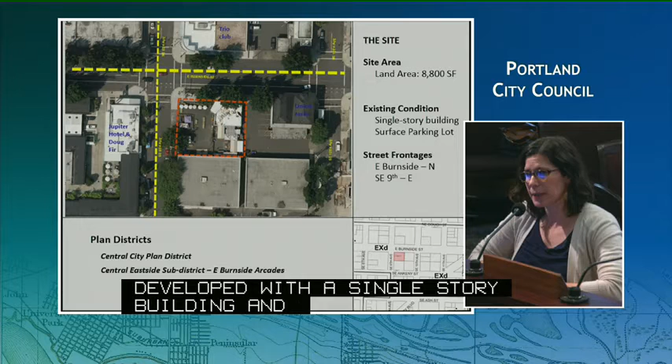Hello, good afternoon. I am Stacy Monroe, representing the Design and Historic Review Team with Land Use Services of BDS, and I'll be doing a brief presentation for the appeal of the Design Commission decision of approval for the Jupiter Hotel expansion. So just to get you acquainted with the site and the project, the site is located on the screen with the red outline. It's at the southwest corner of the intersection of Southeast 9th and East Burnside. It's a little under a quarter block sized lot, currently developed with a single-story building and a surface parking lot. It resides within the Central City Plan District, and more specifically, the Central East Side Subdistrict, where East Burnside has the arcaded condition.

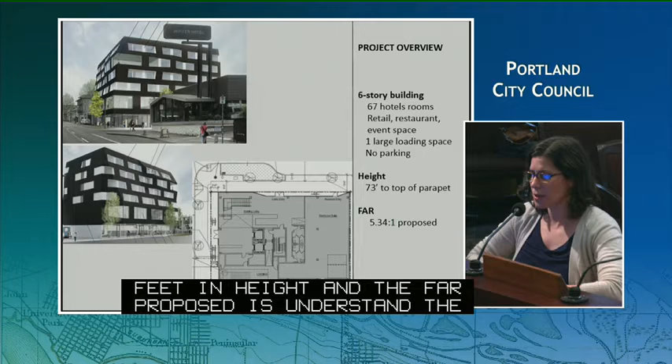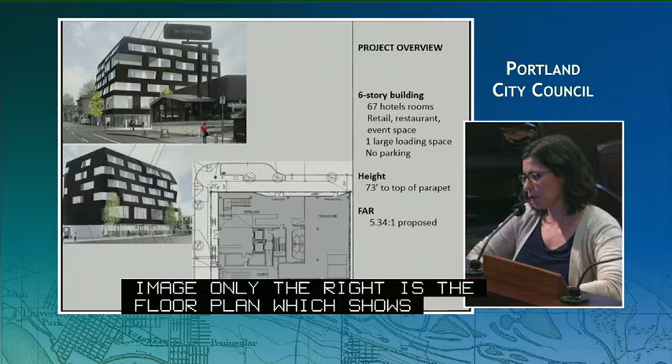So quickly, this is a 6-story building with 67 hotel rooms, restaurant, retail and event space, 1 large loading space, and no parking provided on site. The building tops out about 73 feet in height, and the FAR proposed is under the 6-to-1 allowed. The images on the left-hand side are renderings of the building, both taken from Burnside, and the image on the right-hand side of the screen is the floor plan, which shows the large lobby concentrated at the northwest corner of the building, with commercial space on the east end and services and loading at the south end.

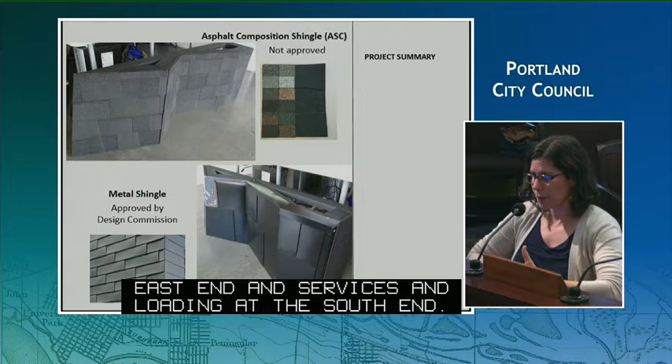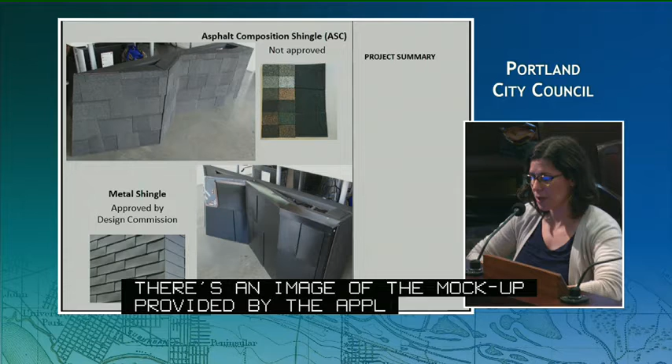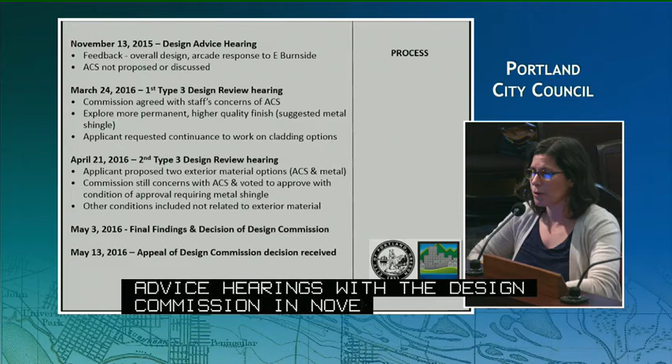So the building proposed 2 materials, the asphalt composition shingle on the top of the screen. There's an image of the mock-up provided by the applicant, as well as an option for metal shingle, which was ultimately approved by the Design Commission by way of a condition of approval. So just to bring you up to speed with the process the project has gone through thus far, it began with the design advice hearing with the Design Commission back in November of 2015. The feedback provided was related to the overall design and the need to respond to the arcaded condition along East Burnside. Asphalt composition shingle was not proposed or discussed at that time.

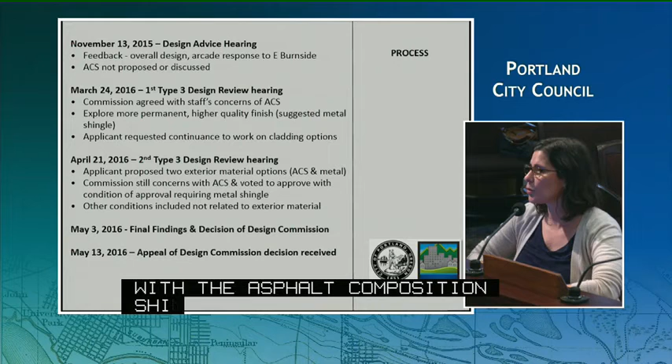The first formal Type 3 design review hearing occurred in March of this year. Staff had highlighted in the staff report, which was not recommending approval, concerns with the asphalt composition shingle, and the Commission recommended the applicant explore a more permanent and higher quality finish, and metal shingle was suggested at that hearing. At that time, the applicant requested a continuance to continue to work on the cladding options. The final and second hearing for the design review occurred in April of this year, April 21st specifically. The applicant came back to the Commission with 2 exterior options, the asphalt composition shingle originally proposed, and the metal shingle option, which was suggested by the Commission to explore.

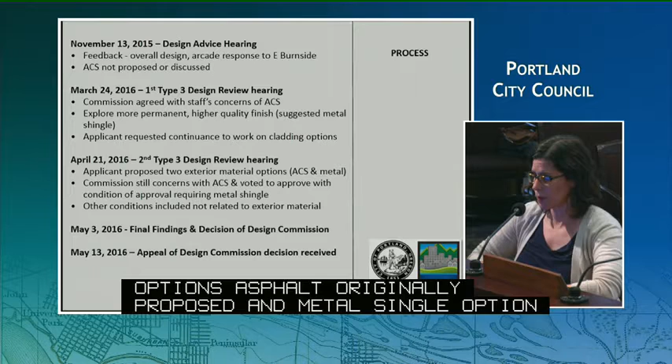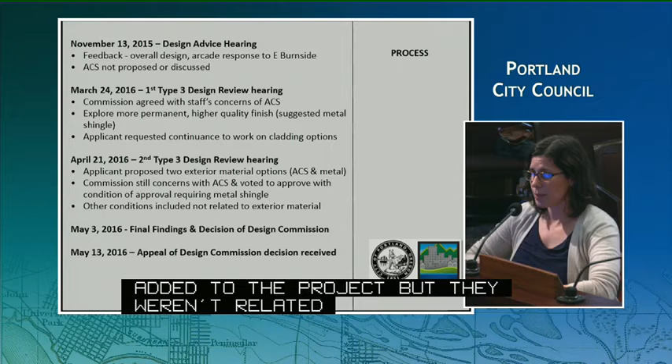The Commission continued to have reservations and concerns with the asphalt composition shingle and voted to approve the project with a condition for the metal shingle exterior. There were also other conditions added to the project, but they weren't related to the exterior material. On May 3rd, the final findings and decision of the Design Commission was published, and an appeal was received from the applicant on May 13th.

So the project is subject to a Type 3 design review with a modification. The approval criteria that it was evaluated against were the Central City Fundamental Design Guidelines, the Central East Side Design Guidelines, and the approval criteria of Section 33.825. A land use review appeal must find a nexus to relevant design guidelines or modification approval criteria. The source of the appeal today is the Central City Fundamental Design Guidelines C2, Promote Quality and Permanence in Development. The applicant states that there was a discrepancy in the Design Commission's interpretation and enforcement of this guideline.

I wanted to provide you a little bit of background on the C2 Quality and Permanence guideline in the Central City Fundamental Design Guidelines. So the background statement says that the quality of building design and permanence of materials are what helps define Central City's built environment. There are numerous historic buildings within Central City, and the quality and longevity of those buildings contribute to the urban atmosphere and the quality and permanence of the area. It instructs buildings to successfully incorporate permanent materials and quality construction techniques that are appropriate for Central City's urban setting and that complement the context of the existing buildings.

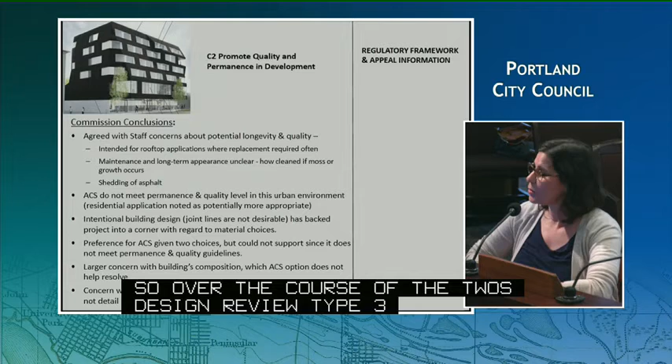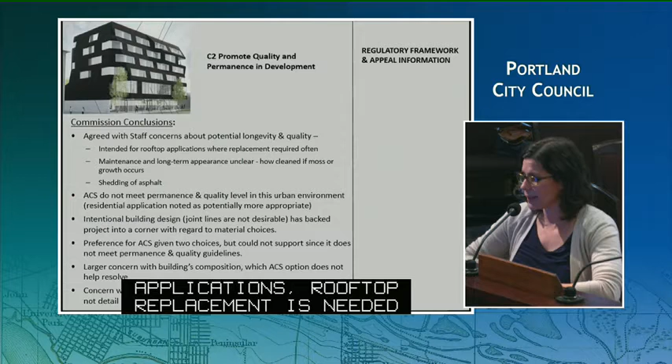So over the course of the 2 design review Type 3 hearings, I'm going to summarize the Commission's conclusions at those hearings. At the first hearing, the Commission agreed with staff's concerns about the potential longevity and quality of the material, which was stated in the staff report, wherein we stated the material is intended for rooftop applications where replacement is required often. Concerns about the potential maintenance and long-term appearance was unclear. If moss or other greenery grows on this material, how will it be cleaned? How will the material respond? And then there's the natural shedding of the material above the pedestrian environment.

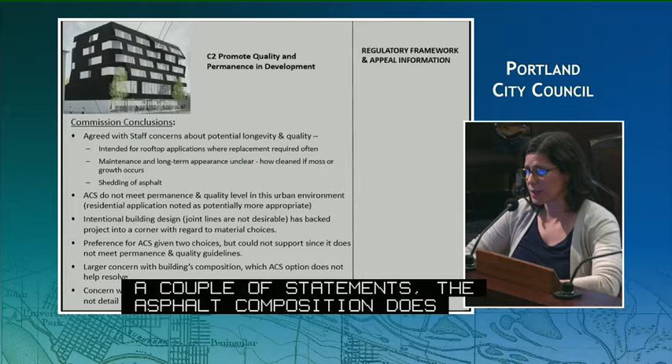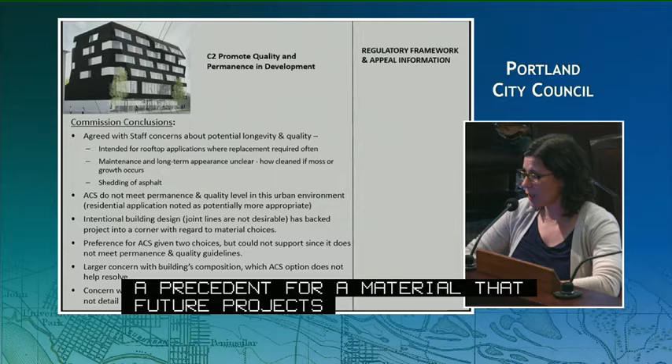A couple of statements made by the Commission at that hearing. The asphalt composition shingle does not meet the permanence and quality level in this urban environment, and perhaps a residential application of this material may be more appropriate. The intentional building design with joint lines that are not desirable has backed the project into a corner with regard to material choices. There was a preference noted by several commissioners for the asphalt composition given the 2 materials proposed. However, they could not support it because it did not meet the permanence and quality guidelines. One commissioner had a larger concern with the building's composition and felt that the asphalt composition shingle didn't help resolve that concern. And finally, there was concern by a commissioner that it was setting a precedent for a material that future projects perhaps could not detail as well or be as appropriate as this design in this location.

So the alternatives before the council today are to deny the appeal and uphold Design Commission's decision with a condition for the use of the metal shingle, or to grant the appeal and modify Condition B to allow the use of asphalt composition shingle as the primary exterior building material, or to allow a choice of either material, the asphalt composition or the metal shingle. And that's the end of my presentation.

I have a question for council and a question for staff. I'll start with council. There are only 3 of us today, and would you remind me what the rules are in terms of how many commissioners have to concur in any recommendation, assuming we get to that point today? Yes, so council rules require 3 affirmative votes to deny or affirm an appeal in a quasi-judicial matter. So that means that you all need to vote the same way. If it appears that it needs to be continued to tomorrow, there will be 4 commissioners present tomorrow. So that's important in terms of our deliberation.

Question, are we on the clock here in some way? In terms of review timeline, yes, the 120-day timeline ends on June 25th, unless further extended by the applicant. And so, again, I'm not prejudging where we land because we haven't discussed it, but if we don't have a consensus today, the options would be to go to tomorrow or to seek an extension of time with the applicant? Yes, although I believe the applicant has already indicated that they are not going to waive the 120 days. Oh, we'll get to that. I want to make sure I understand the ground rules.

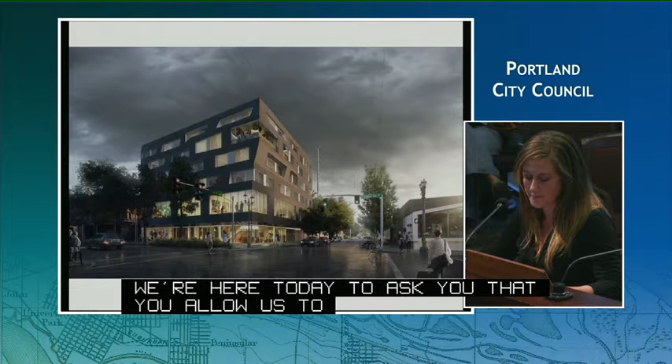As you will hear later in my presentation, many of the design commissioners also agreed that our preferred material was the better option, but they were most fearful of setting a precedent. We are here today to ask that you allow us to move forward with our preferred material. The Jupiter site is sitting on a corner with a fairly eclectic collection of uses and materials that have developed over time. My office has actually done quite a substantial amount of work in the Central East Side. I think we're probably one of the few firms that have done the majority of new buildings and adaptive reuse in the east side, particularly along Lower Burnside. We find the district is very unique. It's gritty. It's authentic.

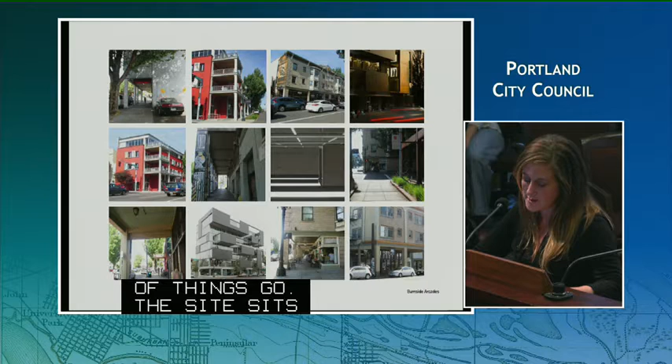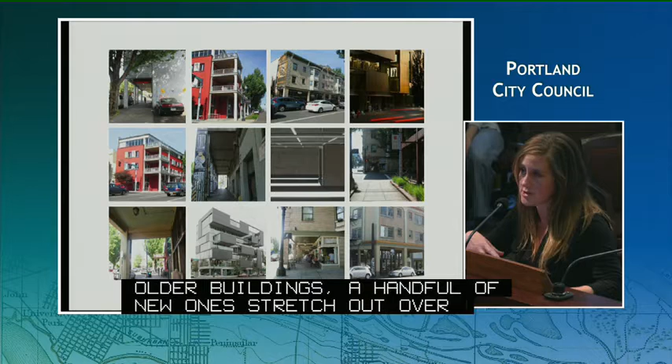The site sits along Lower Burnside and sits in the heart of the Arcade District, which is also completely unique within the city of Portland. Those older buildings and now a handful of the new ones stretch out over the right-of-way and create active relationships to the street and provide unique pedestrian experiences that don't compare to any other kind of location or neighborhood in Portland.

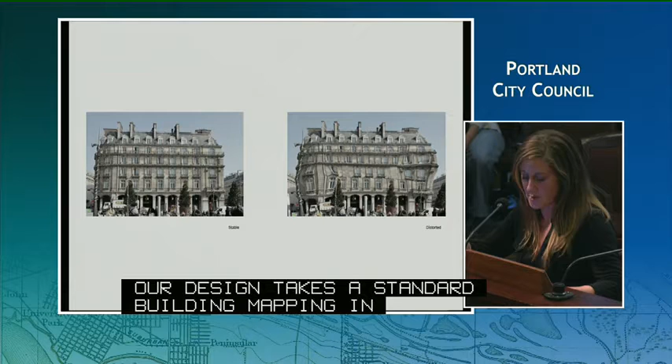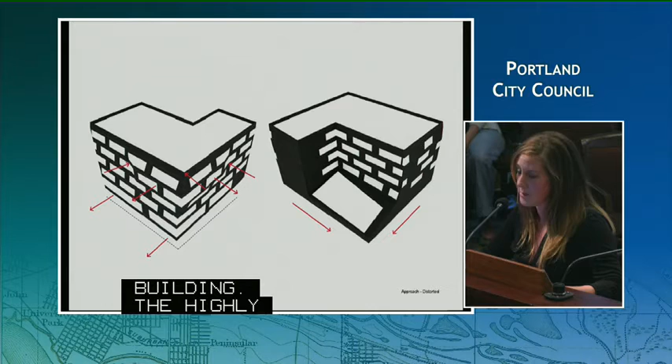During our design advice request, we were encouraged to reinforce that relationship with the other arcade buildings and the other structures on Burnside. Our design takes a standard building massing and a pretty standard program and allows it to distort to build that relationship with the arcade buildings. The highly regular program of the guest rooms mix with the larger public event spaces and upper lobby spaces, and those large volumes stretch and distort the building envelope, and that creates the form.

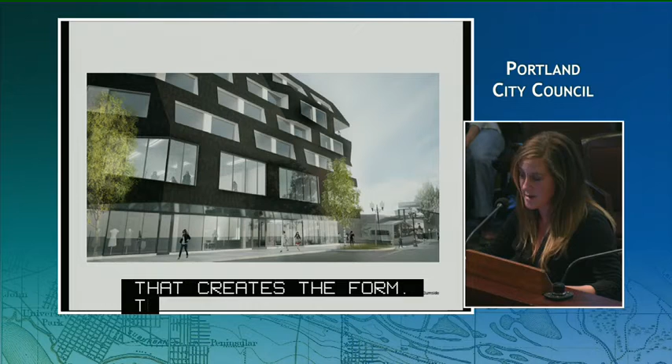That distortion creates a strong siting of the building within the arcades district itself, and the design and massing of the building is a direct response to that district and its context. It's dynamic, it's funky, and it's gritty, and it upholds the design intent of the program and the brand that it's meant to represent with the Jupiter.

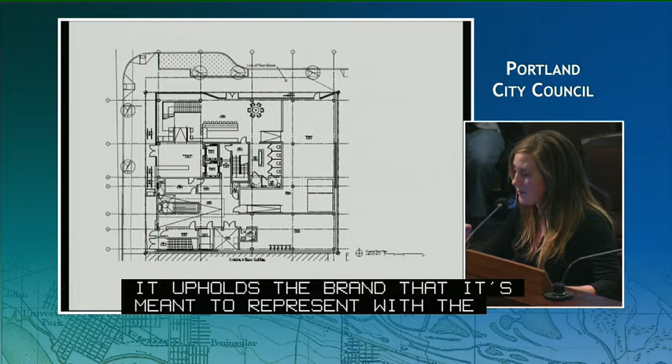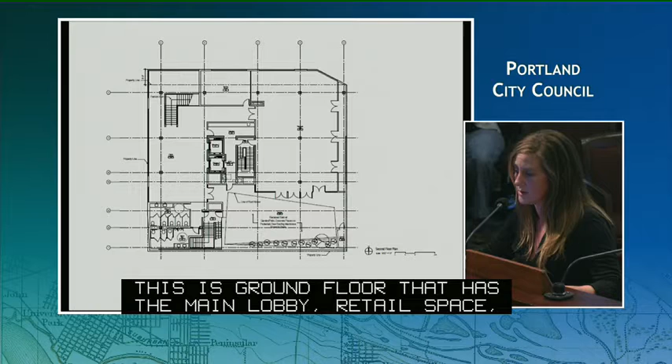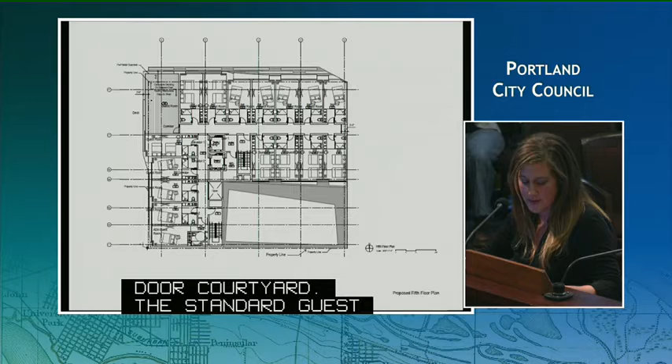Stacy hit on the plans a little bit. I'll move through this quickly. This is the ground floor that has the main lobby, retail space, loading; the second floor, which is home to the large event space, upper lobby, and an outdoor courtyard. The standard guest room levels, guest rooms kind of flank that courtyard and front the street, and there's a deck, public amenity space on the 5th floor.

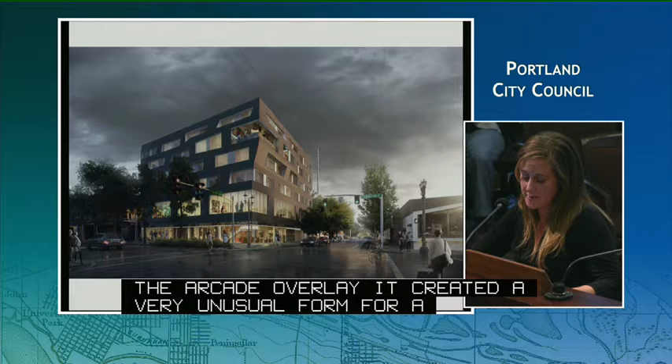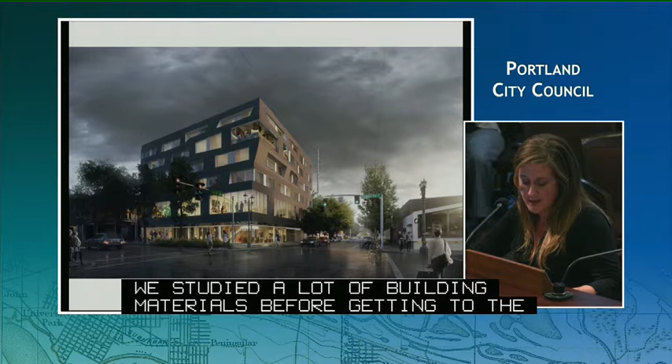So why are we here? When the building massing took its shape as a direct response to that arcade overlay, it created a very unusual form for a building. It's progressive and sensual. It's eye-catching and encourages interaction. We studied a lot of building materials before getting to design commission, and we landed on that laminated asphalt shingle because of its ability to support that design direction.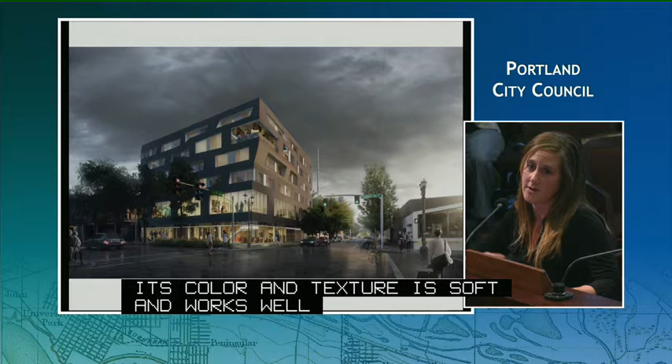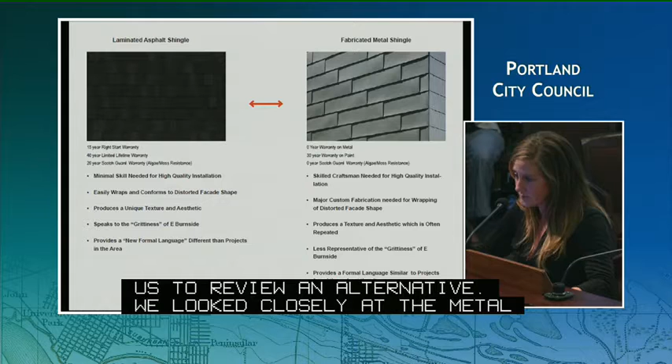Its color and texture is soft, and it works well with the light in the Pacific Northwest, that kind of subtle gray light. It has the unique ability to mold around the soft angles and corners, and it's actually a highly durable and easy to maintain material. However, during that design review process, Commission asked us to review an alternative. We looked closely at the metal shingle option that came from their suggestion and created some direct comparisons.

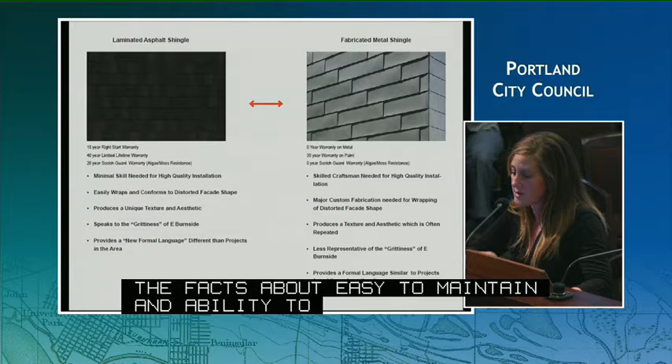We can get into this a little bit later in my presentation, but after all the research, we came back to the asphalt as a clearly superior product, not just for the facts about easy to maintain and its ability to wrap, its texture, its grittiness. It provides a new formal language different than other projects in the area, which is really important to the program and to the brand. But there's less concern about craftsmanship and those details of those transitions.

The commission concerns were simple: the lack of permanence, the lack of quality, and most importantly, that fear that they had of setting a precedent for other projects. So let's talk a little bit about the permanence. The product that we're proposing is a laminated, fully adhered asphalt shingle.

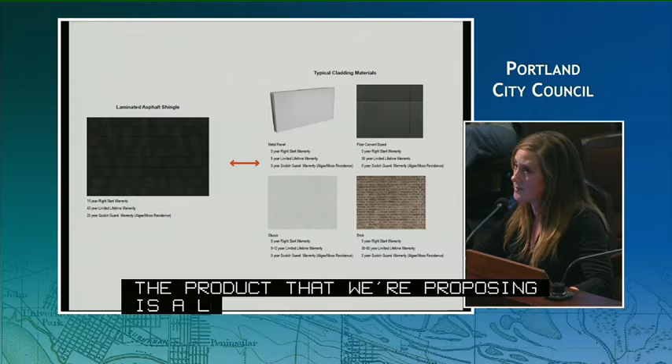It's a wonderful PowerPoint, very helpful. The wording and the print is hard to read. It won't be held against you, but in the next PowerPoint, make it just a little bit bigger. Okay. Otherwise, we can follow what you're saying. Better in the printout? We have a printout that's slightly easier to read. Okay, thank you, go ahead.

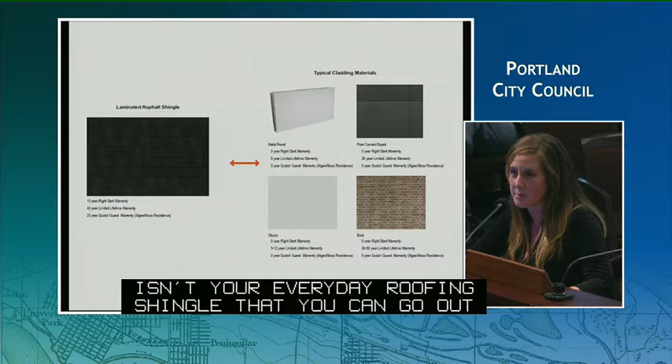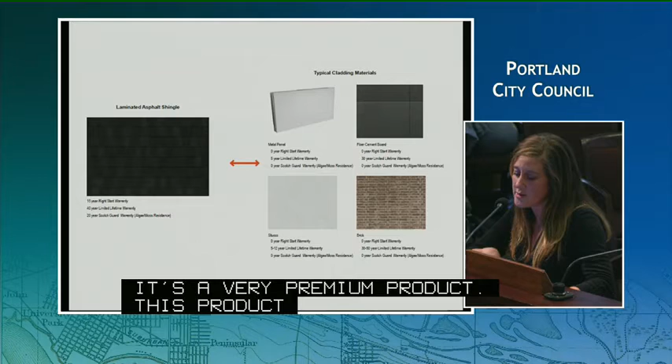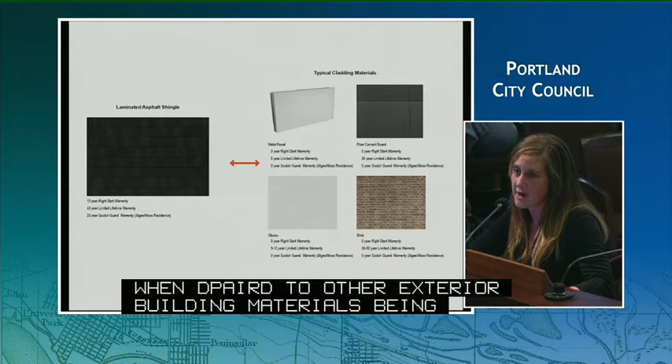The shingle that we're proposing isn't your everyday roofing shingle that you can go out and get at Lowe's, or what most people are putting on their homes. It's actually a very premium product. This product has more than a 40-year warranty, and you'll hear from a Malarkey representative later. When compared to other exterior building materials that are being approved through review processes, this actually outperforms all of those materials in comparing warranties, durability, color performance, oil canning, long-term maintenance, ease of care, and the list goes on.

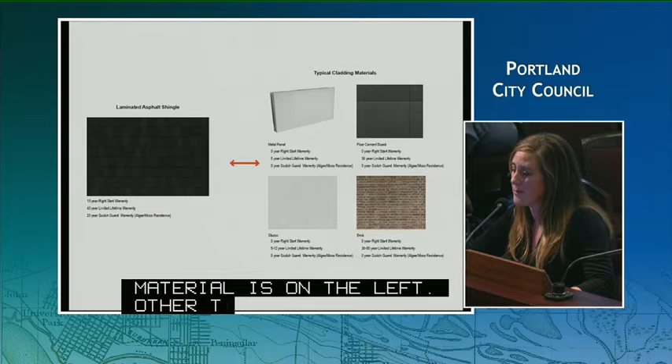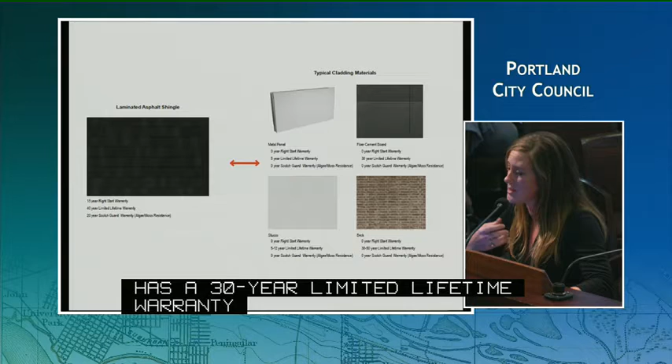So in this slide, our recommended material is on the left. Other typical cladding materials that are being approved are on the right. It includes a backed metal panel, which has a 0 right start warranty, a 5-year limited lifetime warranty, 0 Scotchgard warranty against moss and algae. Fiber cement board or Hardie board has a 30-year limited lifetime warranty, usually on the paint itself, not as much about the material, 0 Scotchgard moss resistance and the 0 right start warranty for initial installation.

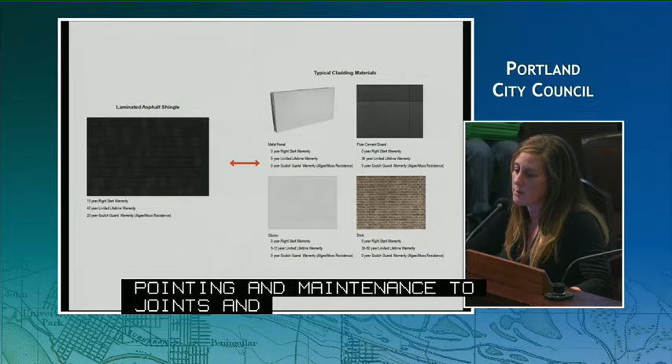Stucco is expected, a 5 to 12-year limited lifetime warranty. Even brick, which has a 30 to 50-year lifetime warranty, there's a lot of conditions about those warranties, about tuck pointing and maintenance to joints and connections that become finicky. Again, when compared to that asphalt shingle, it doesn't come close.

So on top of all of those qualities, the product that we are proposing is locally produced by Malarkey. Most of you are probably familiar with them, but Malarkey has operated in Portland since the 50s. They've been at the forefront of innovation for roofing and have led many industry firsts for all kinds of warranties, this idea of laminated shingles that reduce the little bits that Stacy was concerned about falling off the building. They're the ones that invented the Scotchgard application for moss resistance, which is important for a place like Portland.

This is not relevant, but the city sells Malarkey some methane gas that is captured at the Columbia wastewater facility, which is then piped to Malarkey, which is used, I think, to manufacture some of their product. Yeah, that was actually the very next thing in my presentation. Malarkey has had a partnership with the city and BES for more than 30 years, actually, and initiated that methane harvesting, and they power their plant with that methane gas.

So not only is it a great product in this application, it's also a really great story. Their commitment to sustainability will play a key role in the promotion of the hotel. We've talked to them about talking about their processes and their partnerships with the city, which again, when you're marketing a hotel, it becomes pretty important that you have a good story. And it also promotes Portland's reputation for sustainable innovation.

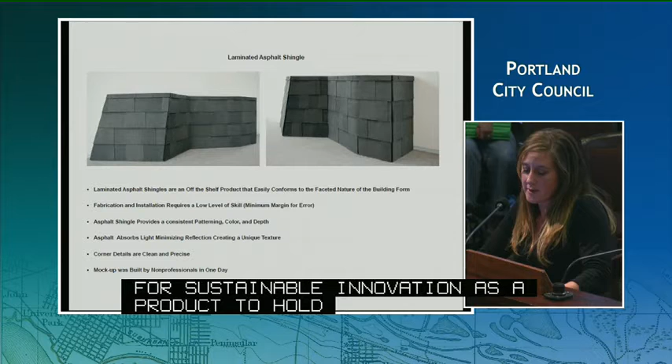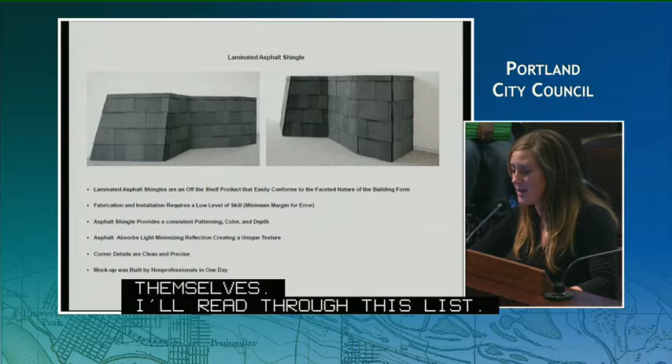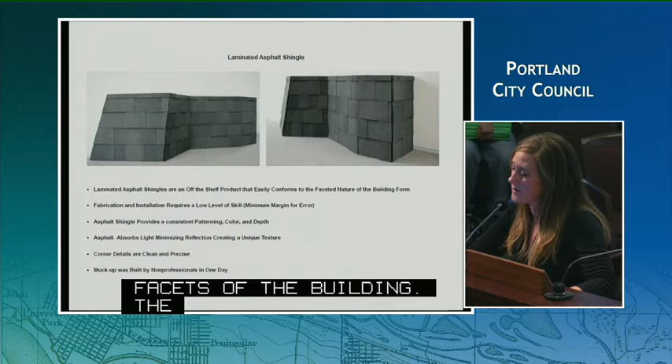To speak briefly about the quality and the design appropriateness, we come back to the material qualities themselves, and I'll read through this list. The laminated asphalt shingle is an off-the-shelf product, but it easily conforms to the faceted nature of the building form. There's no other product that we found that can do that. The fabrication and installation requires a fairly low level of skill, meaning a minimal margin for error. The asphalt shingle provides a consistent patterning and color and depth, which is important for us to achieve the soft building form.

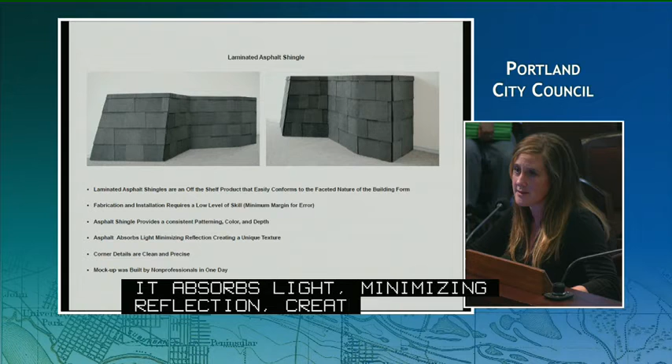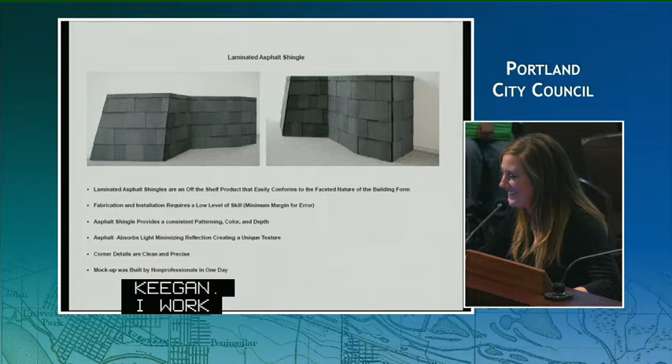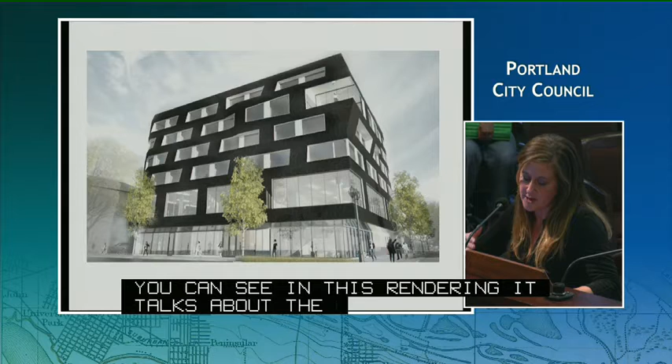It absorbs the light, minimizing reflection, and creates a new, unique texture. The corner details are clean and precise. It's very easy to accomplish. And the mock-up was actually built by Keegan, who works in our office, not a trained professional, and it went together really well. You can see in this rendering that it absorbs that light, which creates that soft form instead of the stiff angles and transitions that happen with the metal panel.

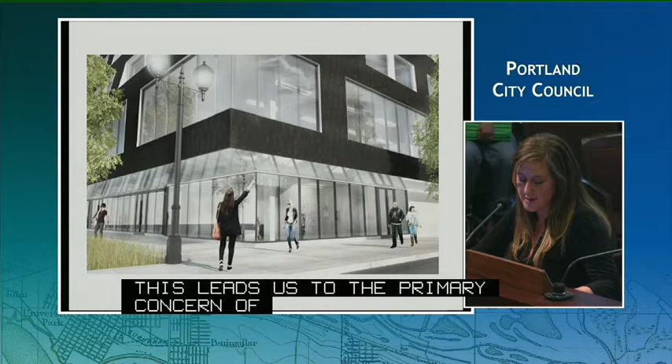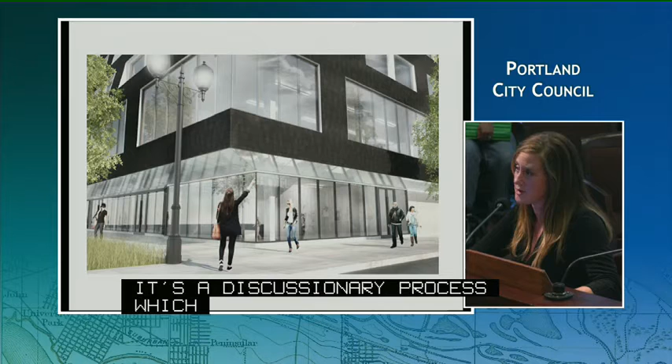So this leads us to the primary concern of setting a precedent. To set a precedent is to make a decision that could be applied to a broad or general body of projects or applications. The Type 3 process is actually a discretionary process which should allow for approval of items that wouldn't be allowed in a prescriptive process. The issue of setting a true precedent actually shouldn't be a concern here in this case. The project is truly unique in every way.

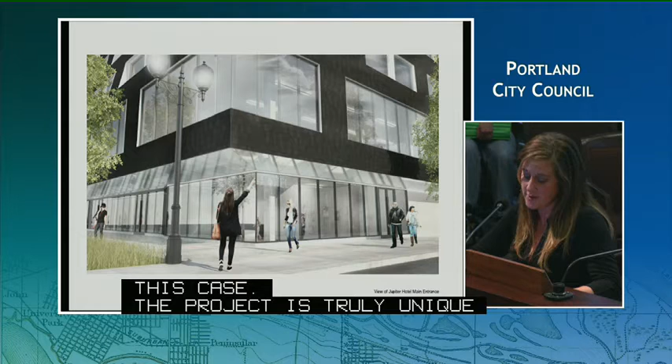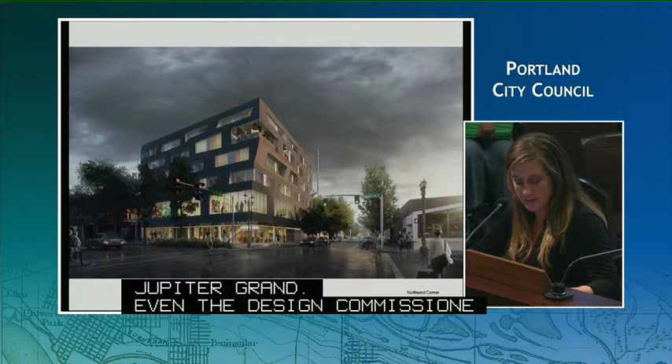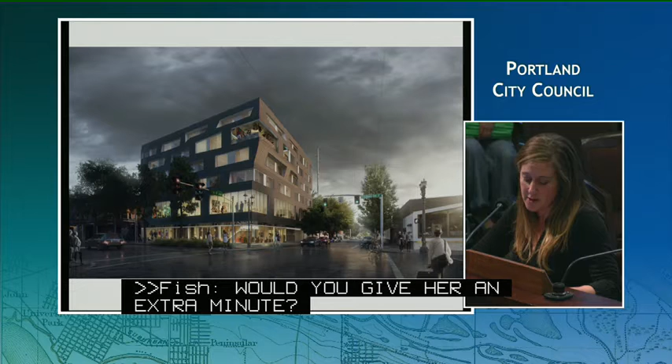Even the design commissioners during their deliberations, as you'll hear now as I play a clip... can we keep going? We're almost running out of time. Karla, since I asked two questions, would you give her an extra minute? In the clip, you'll hear Commissioner Livingston, Commissioner Molinar, and Commissioner Vallaster voice their support and/or clear preference for our proposed material. And I have this queued up here.

Famous last words with our laptop. I know. Fingers crossed. Here.

Of the asphalt shingles, and I really appreciate the amount of work that the applicant put into restating the case today, and I actually like the argument that you've put before us. But for me, it still comes down to the issue of establishing a precedent, that there is a way that we could permit this that could be so tightly constructed and so tightly scripted that it would prevent an applicant coming in next week with a proposal for asphalt shingles that is not nearly as well realized and not nearly as appropriate as it is in this circumstance. So I regret that still today I will not be able to support the asphalt shingles.

What about the metal? You know, I actually prefer the asphalt. I don't think the metal is the way to go. I think the asphalt actually accomplishes what the applicant would like to accomplish.

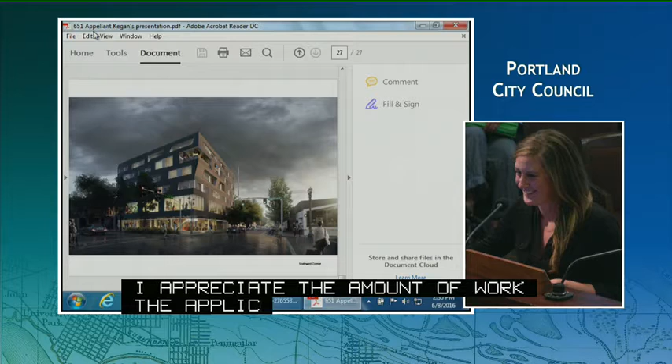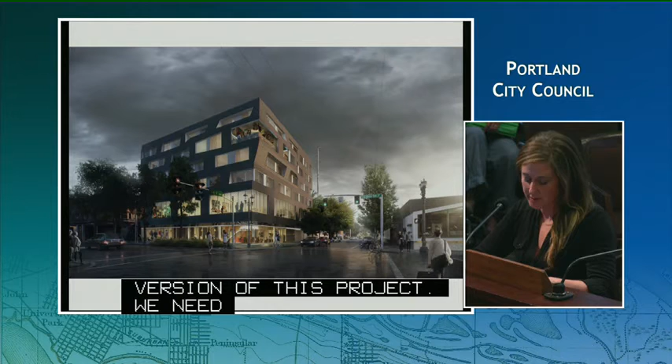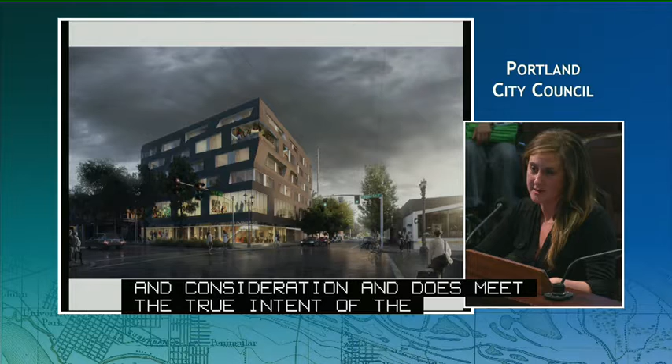So today, we're asking that you help us pull off the best version of this project. We need your help to push the envelope and do something a little funky and daring, but something that is still rooted in careful thought and consideration and does meet the true intent of the design guidelines and the city's design review process. We ask that you help us make a statement of support for innovation and that you make a statement for the design community.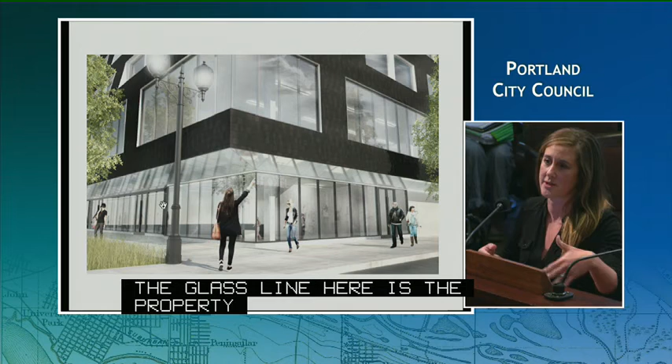Thank you. Questions, colleagues? Yeah, I have a question. Where's the arcade? So the arcade is, if you look at this image, everything that you see on the left side is what's projecting out into the right-of-way on Burnside. So it projects about 9 feet over the sidewalk. So the glass line here is the property line, and that building kind of pushes out. So it doesn't have columns, but it's creating that relationship, kind of like the B-Side 6 building down the street. It creates the pedestrian cover and brings the building faces out in line with the arcade structures without having columns drop down on the sidewalk.

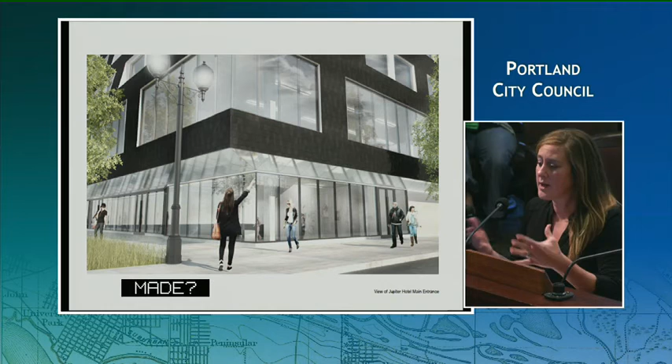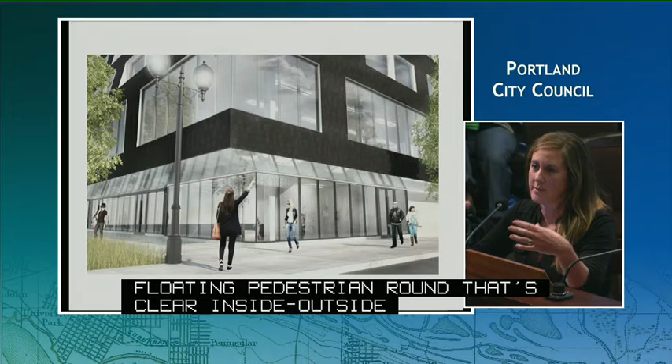And why was that choice made? Not to have columns. Yeah. One, architecturally, it's about lifting this very highly regular program off of the street. And so what you're experiencing is this floating pedestrian realm that's the clear inside-outside lobby relationship and retail, and the building kind of hovers above. So that it's basically like an awning? The whole building is what's kind of projecting out.

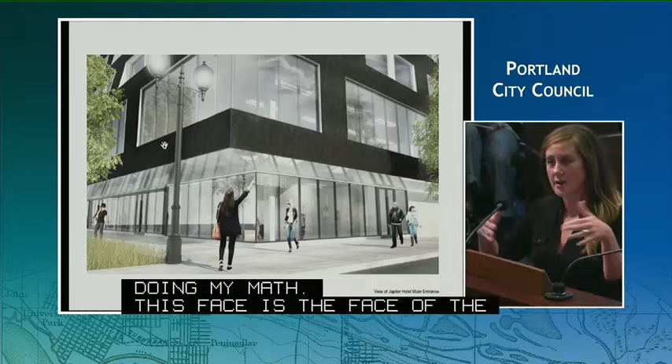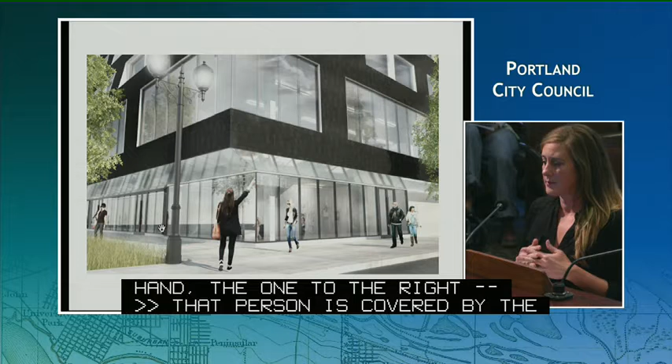So this face, and I don't know if you can see my mouse, this whole face is actually the face of the building. So if you're standing under it, you see the soffit. Right, so that person that's walking, not the one that's raising his hand, but the one to the right. Yes, that person. Is that person covered or not? Yes, that person is covered by the building. By the, it looks like the wall is very close to where that person is walking.

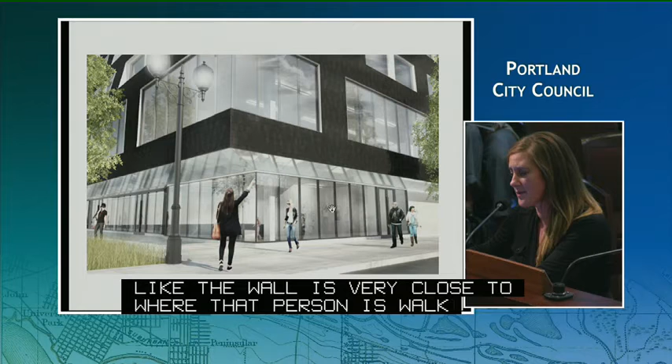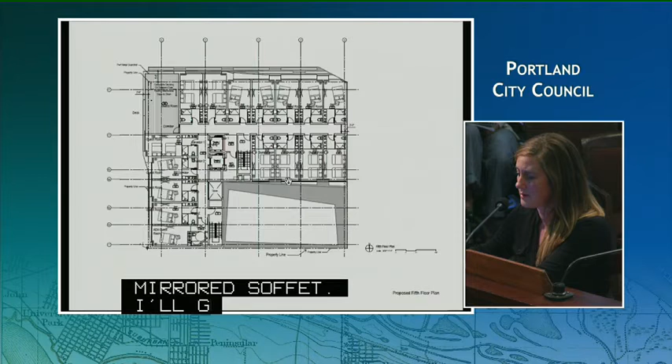So the wall of this, which is the ground floor, is the property line, and everything out here is a mirrored soffit. So I'm going to get back to one of the early diagrams. So for instance, this is that glass wall that that person was standing next to, and this line is the line of the building above. And so everything out there is part of that arcade relationship that aligns with the building next door, which was the other historic arcade building.

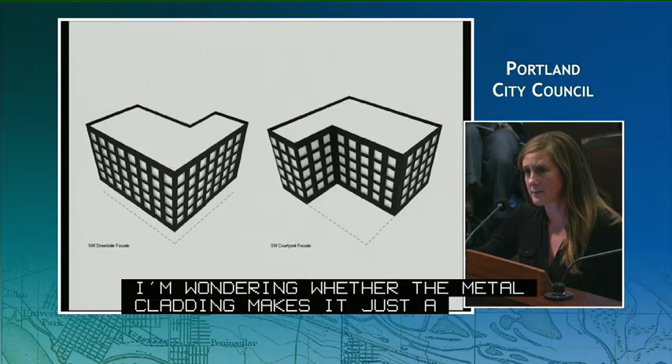And I'm asking the question because I'm struggling with that the building doesn't seem to fit in with the character of the district, and I'm wondering whether the metal cladding makes it just a tad less funky, as the word that you said. I'm wondering if that gives the sense of historic permanence rather than the asphalt, which doesn't look like any of the buildings that are there now.

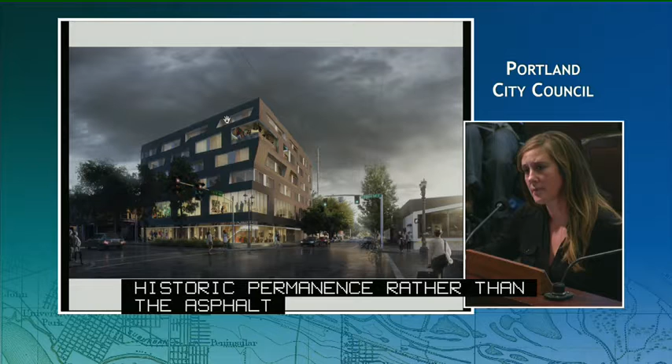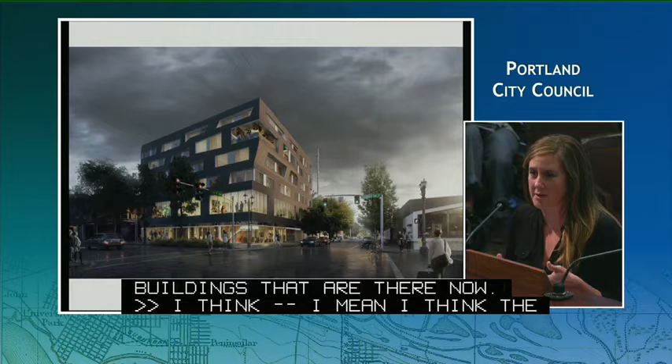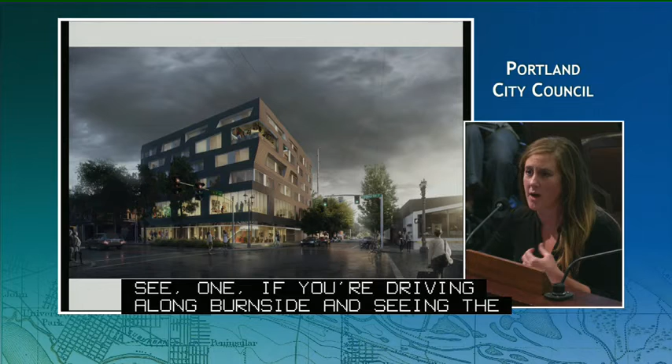Right, and I think none of the arcade buildings in that district have, I think the shingle or that material isn't what builds its historic relationship to the arcade district. I think it's the experience that you see, one, if you're driving along Burnside and you're seeing the faces of the buildings come out and project, or if you're walking along the right-of-way and that continuance of pedestrian cover, and that experience is what's building that relationship.

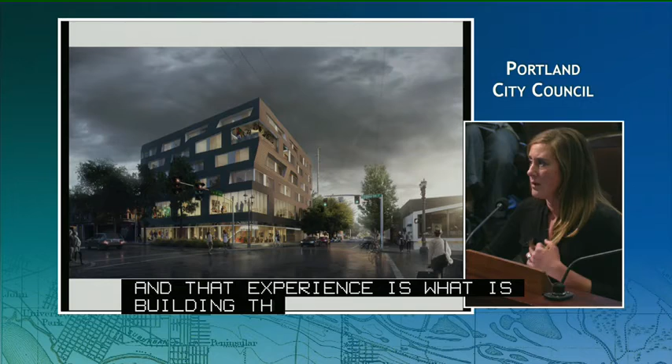Two questions. One is, since quality has been raised as a consideration in this, is there a significant price difference between using the laminated asphalt shingle and the metal siding? The metal shingles are slightly more, but it isn't something that's playing a role. It's actually a pretty insignificant difference in the big picture.

I think it's more about... And in terms of the district, are there other buildings in the district that are proximate to this building that have the metal shingle? No. In fact, the building right next door, which is the arcade building where Union Jacks is located, actually has an asphalt shingle roof above its masonry line.

Commissioner Novick, any questions? Yeah, what the commission said is that they have concerns about permanence and quality, not just about precedence. So you say that the primary concern is about precedence, but it does seem to me that the commission explicitly or implicitly rejected what you say, which is that the asphalt material will actually hold up better and is subject to better warranties. So can you just talk about that a minute?

As I read it, the commission didn't just talk about precedent; they were concerned about permanence. Right. So the commission had, and if we pulled it out, the words that came up a lot were those three primary concerns. It's about the quality of the material. It's the permanence of the material, and most all of those comments came back to this idea of setting a precedent because it's untested in Portland.